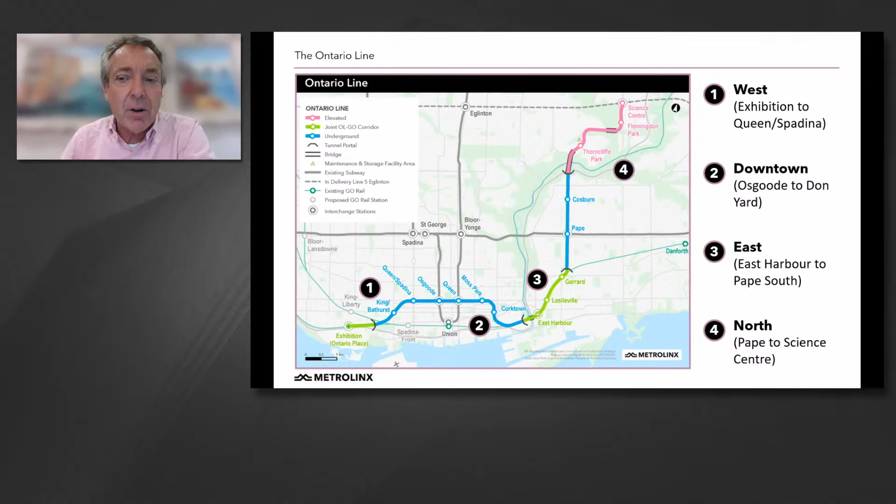So the Ontario Line runs from Exhibition all the way through to the Science Centre. Tonight's presentation is in Area 4, the north, that runs from Pape to the Science Centre.

The Ontario Line is going to bring a lot of transit benefits to Toronto and the community. An example is from Thorncliffe Park to downtown. The travel time is going to be reduced by 15 minutes, which gives a half hour every day back to people. We're also expecting less crowding on Line 1 as a result of the Ontario Line, especially at the very congested Bloor-Yonge station.

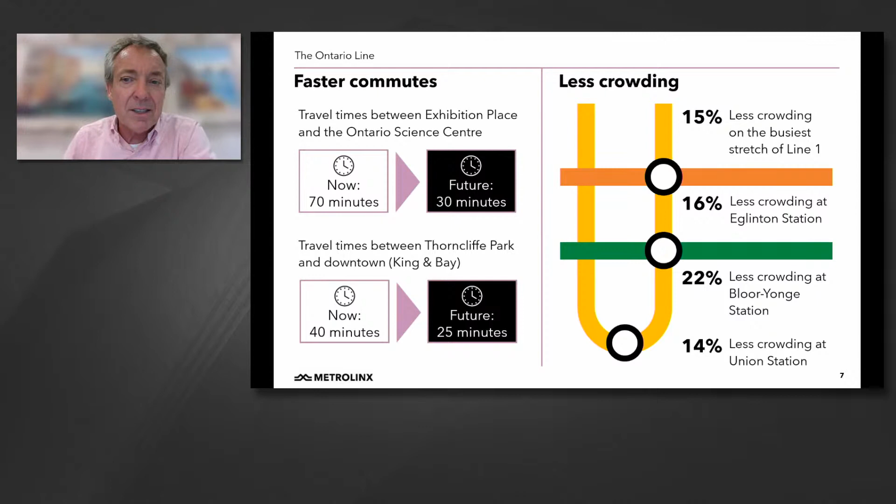So tonight we're going to run through the 2 underground stations at Pape and Cosburn with a very high level talk. We'll be bringing those 2 stations back at a future virtual open house. We're going to talk about the elevated stations at Thorncliffe Park, Flemingdon Park, and Science Centre, and of course the maintenance and storage facility.

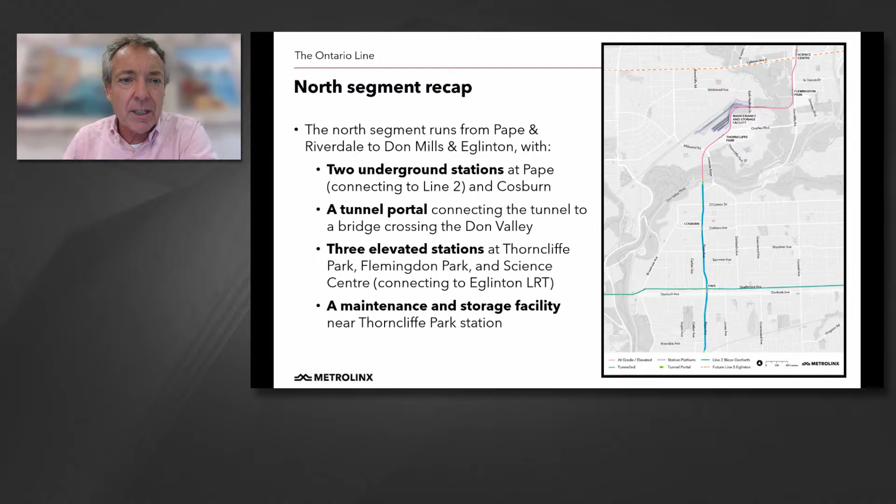So what we've done in the Thorncliffe Park and Flemingdon Park area is we're currently setting up 2 tables. One is to explore the design principles for the fences and areas around the maintenance and storage facility. We're also setting up another community table to talk about how we can improve the public areas below the elevated guideway where the trains run.

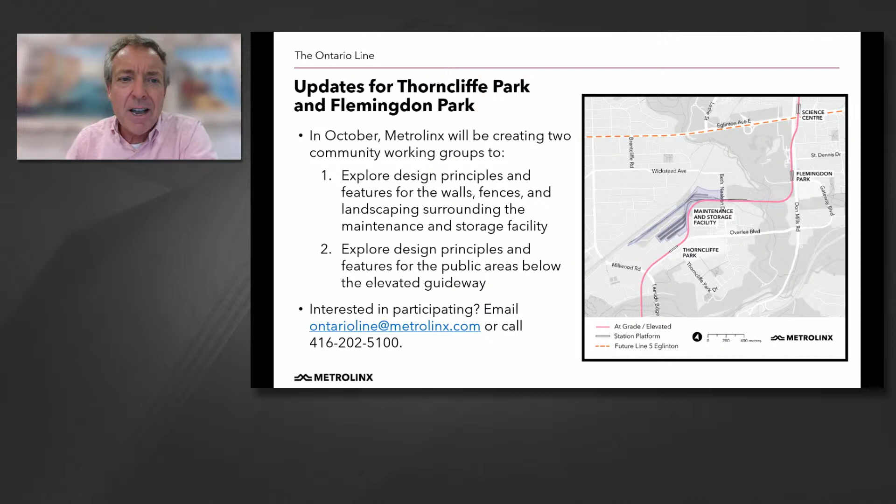Tomorrow, Metrolinx will be launching a public survey and asking the community for their opinions for the key objectives for the Ontario Line design options, which you're going to be seeing tonight. The survey will be live on metrolinxengage.com until October 16th, 2021. We'll also be sending out the link to our event tonight.

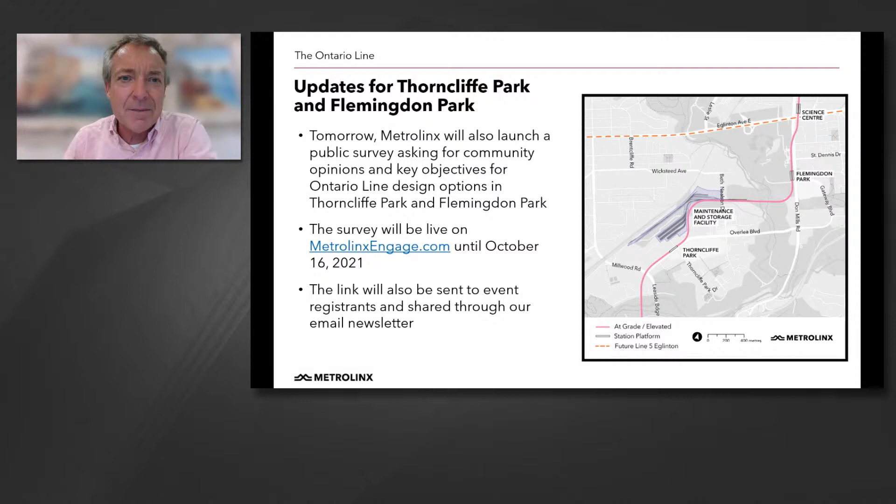So I'm going to hand it over to John Potter, and John's going to talk to us about the design objectives for the Ontario Line. Yeah, thanks, Malcolm. So just by way of introduction, Malcolm talked about the survey that's going to be on the Engage website. Much of what we're going to be seeing over the next 10 to 15 slides, we talk about design objectives, but really what we're doing is presenting you with some ideas to stimulate discussion.

Either now or in your responses to the survey, because there are areas for meaningful community input into the design, especially for the perimeter fences around the maintenance and storage facility, and what you'd like to see in the public areas beneath the elevated guideway. So what we're going to show you, this is really to kind of get you thinking and solicit your feedback.

Next slide, please. So we really started this process of soliciting feedback in August when we took 2 groups of local residents on tours of 3 sites. We wanted to give them some firsthand views of what these facilities are like and how they fit into their respective communities.

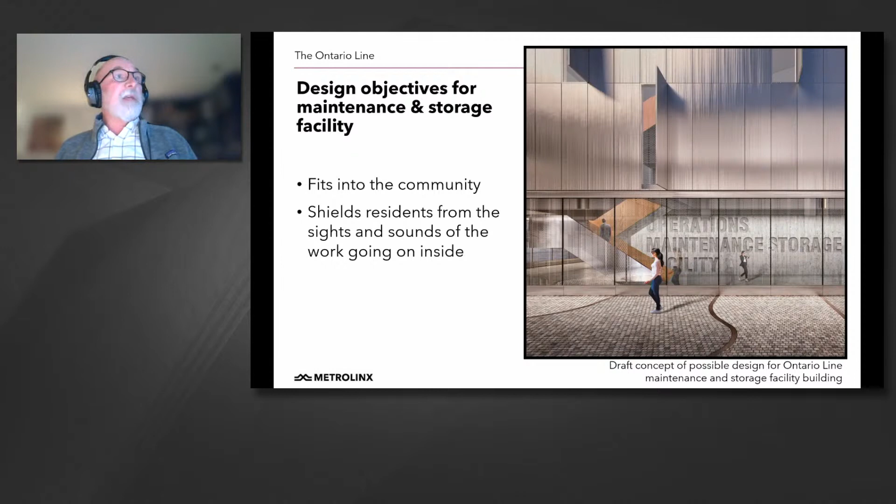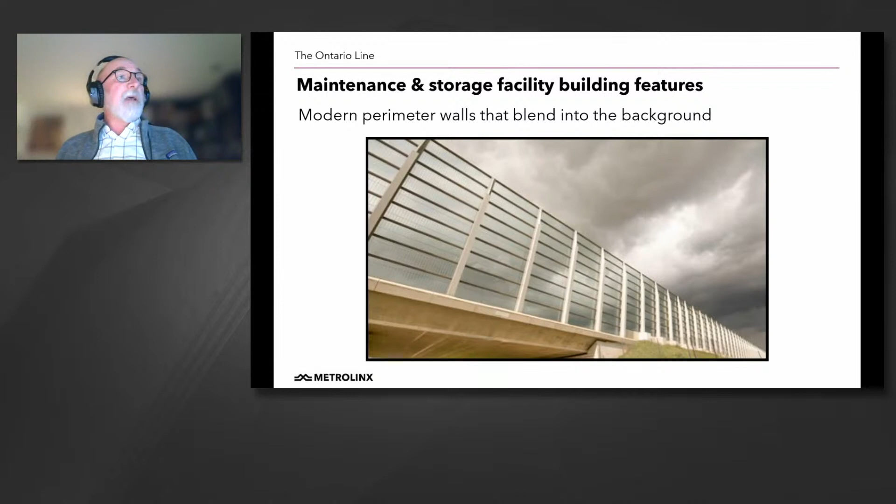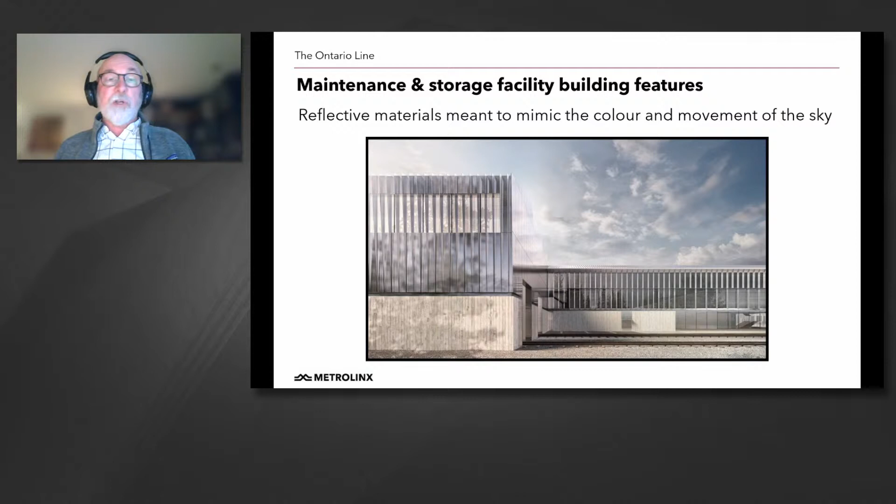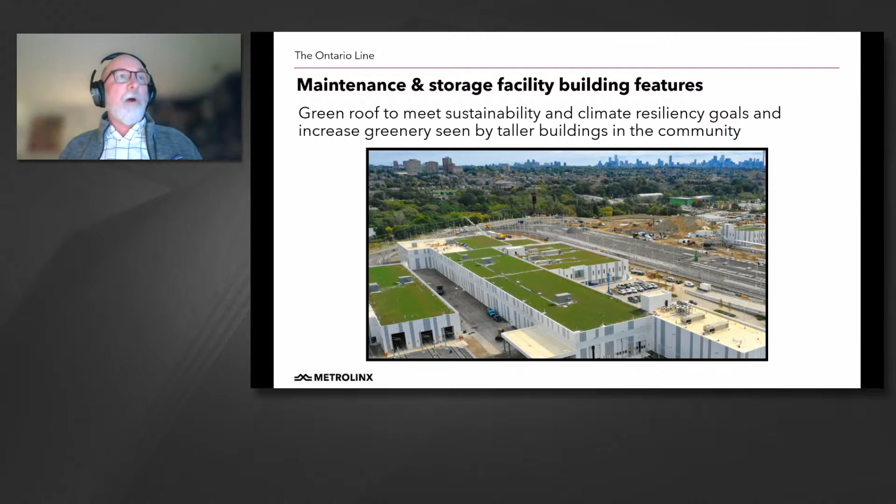One of the important features of our MSF, the Ontario Line MSF, which we also have on the Eglinton Crosstown LRT MSF, is a green roof. The importance of the green roof, obviously, is it helps us meet our sustainability and resiliency commitments, but also, if you think about the view from grade, it's the perimeter fencing or screens that determine the identity of the MSF in the community. For all the buildings that have overlook on the site, these green roofs will be an important amenity. Believe it or not, they will read almost like a meadow or a park in the middle of the yard, the maintenance yard.

So this next section, we're going to go through a series of slides pretty quickly, looking at some ideas for what we call the perimeter fences, walls, and landscaping around the maintenance and storage facility. This is where we're really looking for your input, because this is how the community will experience the MSF, especially down Thorncliffe Park Drive. There are a few areas where it will interact with the community, and we want to make sure we create the kind of look and feel and spaces that will both fit and also be welcoming and attractive.

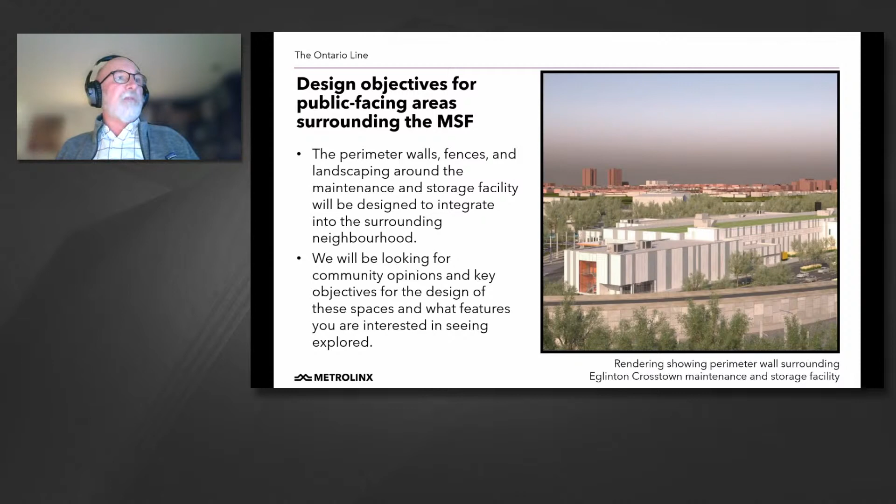So if we go through, we'll go through the next 5 slides pretty quickly. These are not proposals that we're actively developing right now. These are ideas to plant seeds in your head so that you can think about what you might see. So this is an example of a screen, whether it's your taste or not. It's just a very contemporary, very simple background.

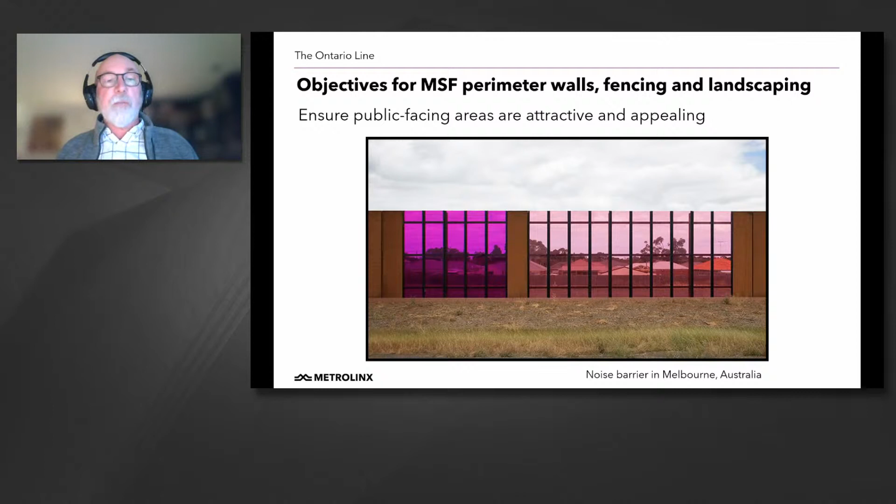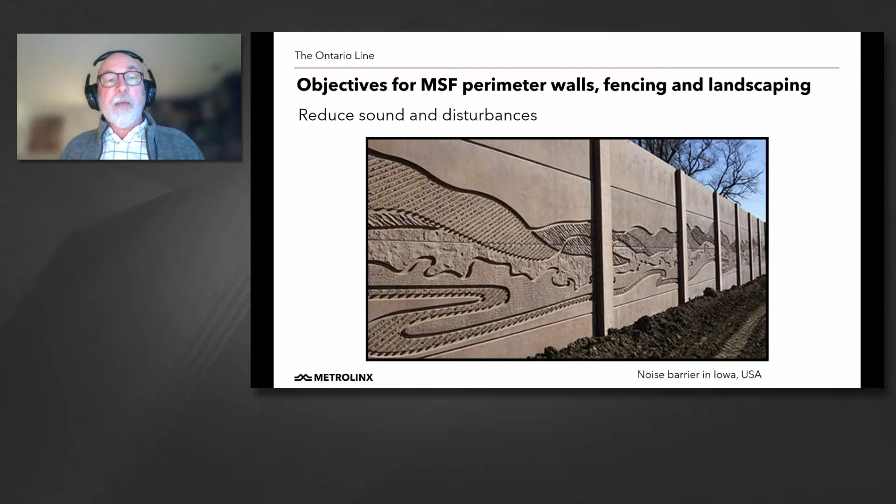This is a noise wall with a patterned concrete surface that works almost like a bas-relief or a 3-dimensional mural.

I think this is a very potent image. This is the bike trail in front of the perimeter walls for the TTC Leslie Barns project. You can start to see where space allows that this can be quite a nice feature within the community.

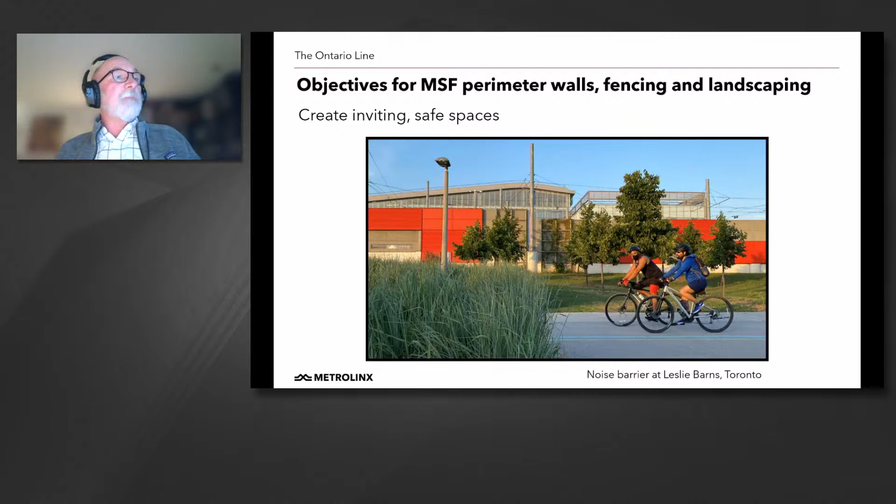Here, even though it's a gray sky, the murals themselves offer a lot of opportunities. Murals are a way of reflecting the community back at itself. This is a way of engaging local artists or local community members to create an expression of their community that they can see and exists as an artifact.

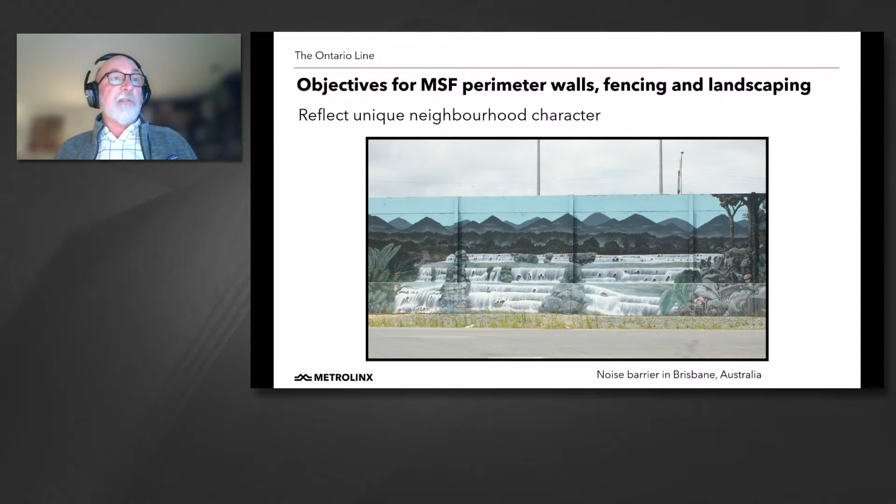So this one's probably the most telling. It's just the way we look at things. There's not going to be one solution for the entire perimeter fencing of the MSF. Some parts look over a hydro right of way. Some are adjacent to a ravine where we really don't want to draw too much attention to the fence. We actually want the perimeter screens to disappear into the vegetation. Other times, though, like you see here, these are areas where you will probably have a lot of contact as community members with the perimeter of the MSF. So we want to get your input on what you'd like to see.

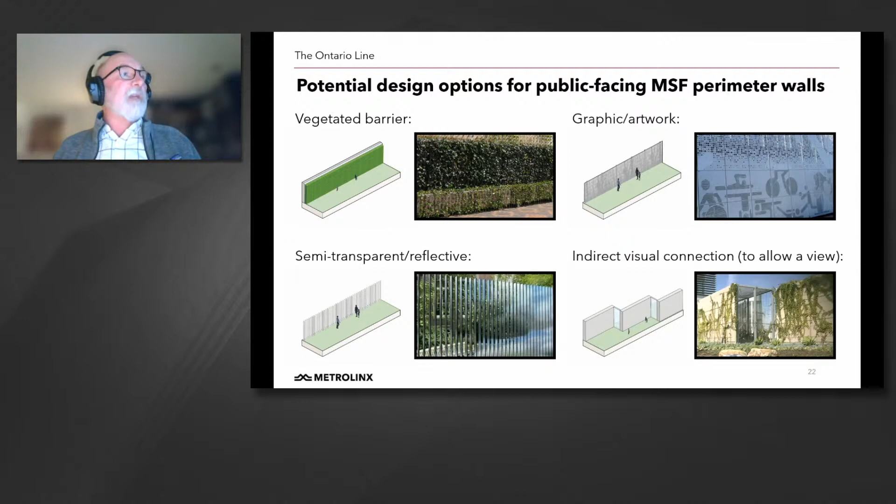In the next section, we talk about design objectives for the elevated guideway. We're working very hard on the design of the guideway itself, to make sure it's clean, simple, and elegant, and has the least impact on the adjacent community. We're looking at precedents from all over North America and globally to take the best design elements and extract lessons learned from what doesn't work. But really what we're going to be talking about now is how we're going to use or program the space at grade underneath the guideway.

This is an area we want to come back to the community and get input on. This is going to be a space under the guideway running adjacent to Overlea Boulevard, and as you know, Overlea Boulevard is the commercial heart of Thorncliffe. So what is it that the communities would like to see under there?

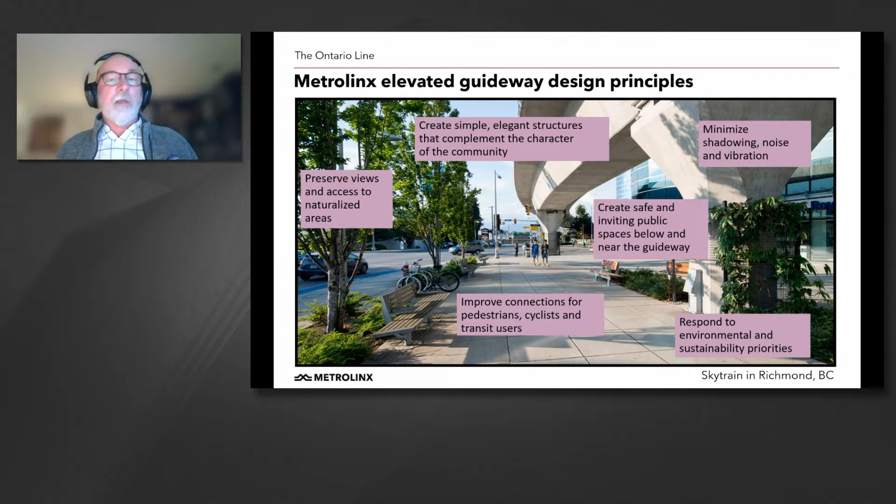If we go to the next slide, we're going to go through three or four different concepts that speak to different ways of occupying the space. This one, for instance, is more treating the underside of the guideway as a recreational space—a kind of micro amphitheater. This wouldn't be what we do along the entire length of the guideway, but it could be an idea for a particular, important location under it.

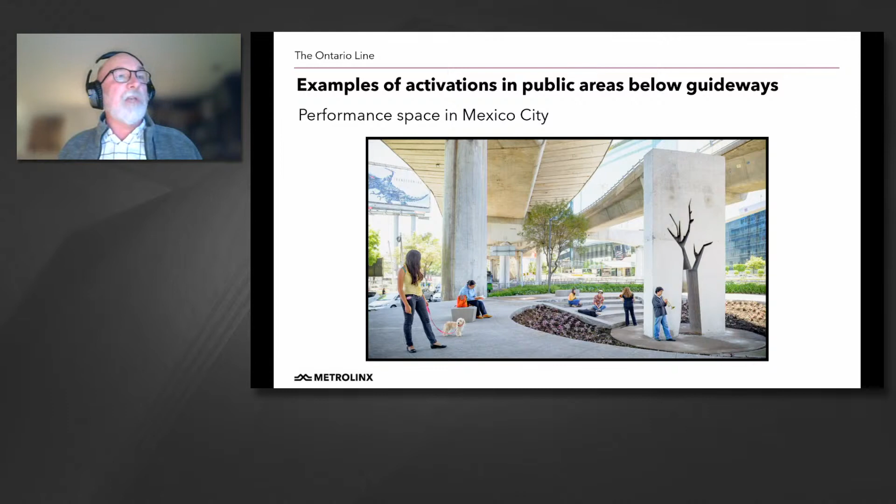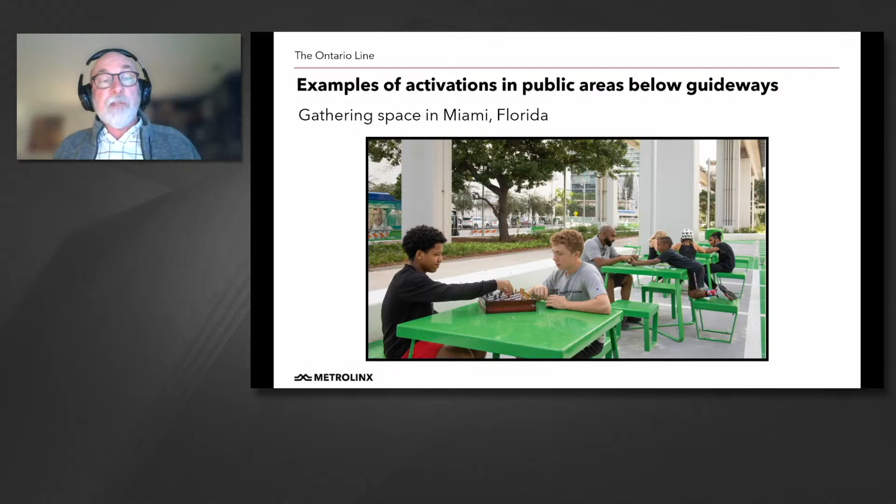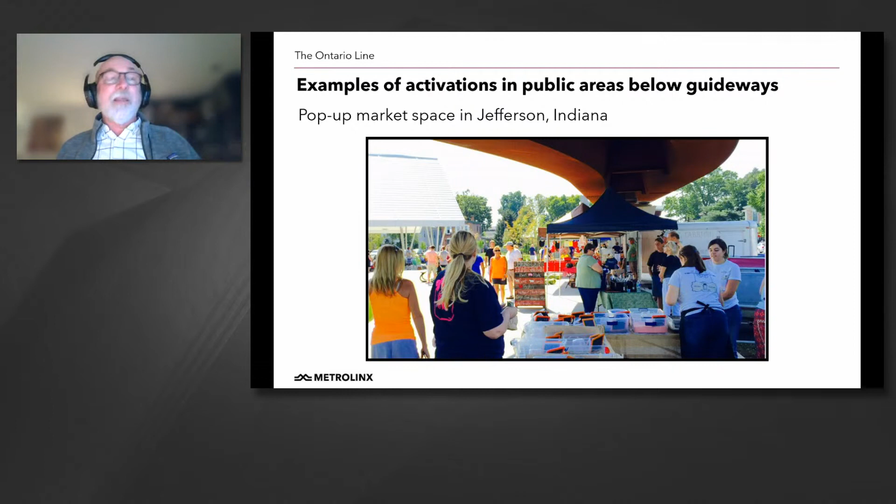Does it make sense to have some landscaping, vegetation, and put out tables? Do we treat this as a multi-use space where we make sure there are enough services that you can put tables out, have different kinds of events—farmers markets, crafts fairs, art fairs, or other mercantile activities—that support the existing character of Overlea Boulevard?

We have some good examples right here in Canada. In Vancouver, they create a nice mix between wide and comfortable boulevards with seating and landscaping, which together creates quite a pleasant place to inhabit and move through.

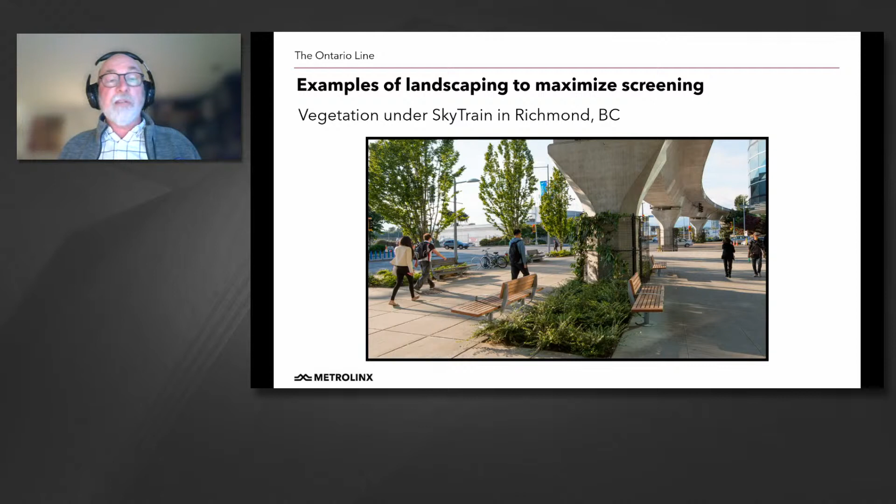Overlea is the commercial heart of the neighborhood, and what's there today are low-rise buildings, with Costco and various other businesses along there. But as we know, the Ontario line will be a catalyst for social and economic change. So we want to plan for what the street could look like when the Ontario line opens, or even 10 years after that. We're not asking for what you'd want based on how you know the community today—it's really a visioning exercise of what you hope to see the community evolve into over the next 10 to 20 years.